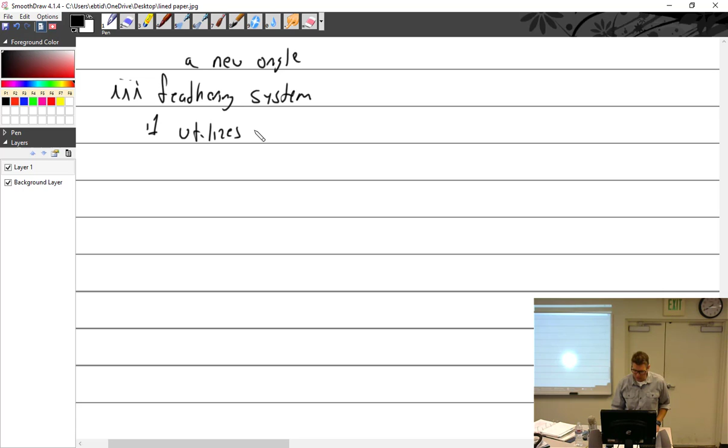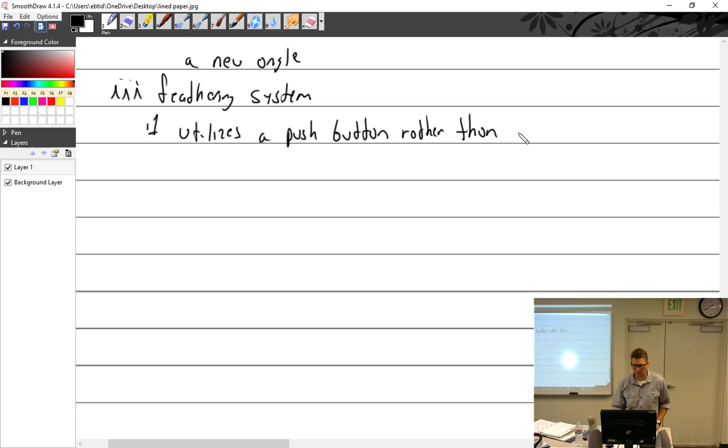remember. Not wrong. All right, we were talking about the feathering system, and I was writing notes for you because we already went over how it works. So this is what you wanted, so this is what you're going to get. Hand already hurts. Utilizes a push button rather than a lever to feather and unfeather a prop.

If you remember, on most planes, you just take the handle that says prop and just keep pulling it all the way back. There's usually a detent or something that keeps you from inadvertently going into feather while you're flying it, because that's not good. Oops, that was way up there. Okay, I didn't want to put that.

So, is there like a critical zone for feathering? Like if you go into feather while you're flying, there's a certain time that you can be in there, and then you have to service it? Or it's critical engine out. You want to talk about critical engine out? A one minute thing. So in an engine that has two right rotating, if you have a right and a left, you don't have critical engine out, do you?

Correct. Okay, so they're both normally turned to the right. Most twins turn to the right. I only know of a few that one goes right and one goes left. What is the one you fly? No, they both go to the right. It's just the Seminole, I think. Yeah, that's the only one I could think of. The Seneca. Piper Seneca is the only one I could think of.

So below a certain speed, you have critical engine out, which is which one? The left. Most critical. See, that's why I needed you to tell the story. So when the left one dies below a certain speed, and that's the blue line, right? No, the blue line is your single engine climb speed. Ah, okay. The VMC is your minimum controllable airspeed, below which you don't have enough rudder authority to counteract that yaw tendency. So that's not the blue line.

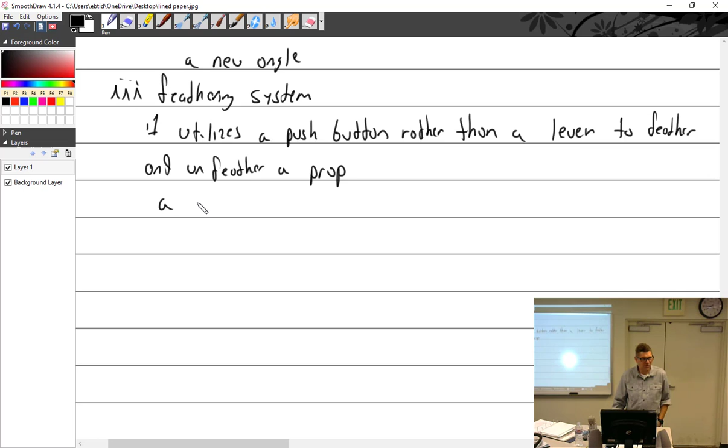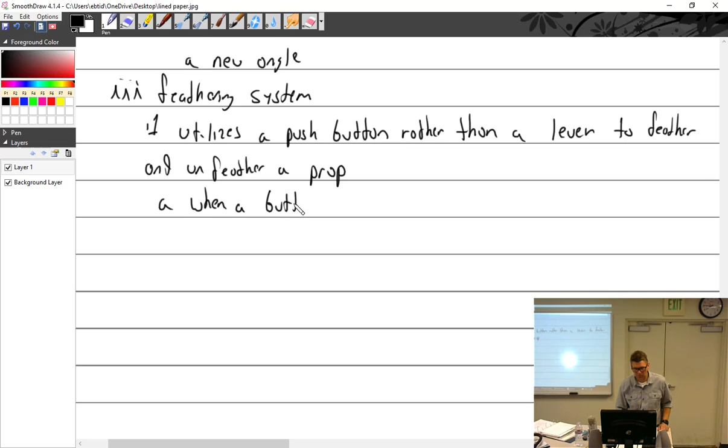Let's see. When a button is pressed, a holding coil holds the button in until the feathering operation is complete. Well, how does it know when it's complete? Pressure.

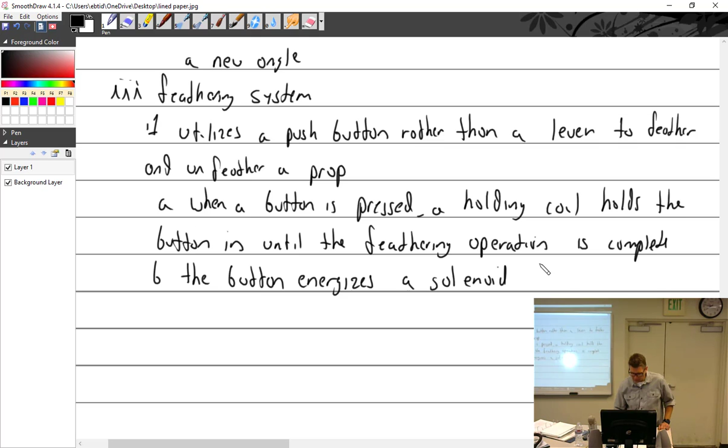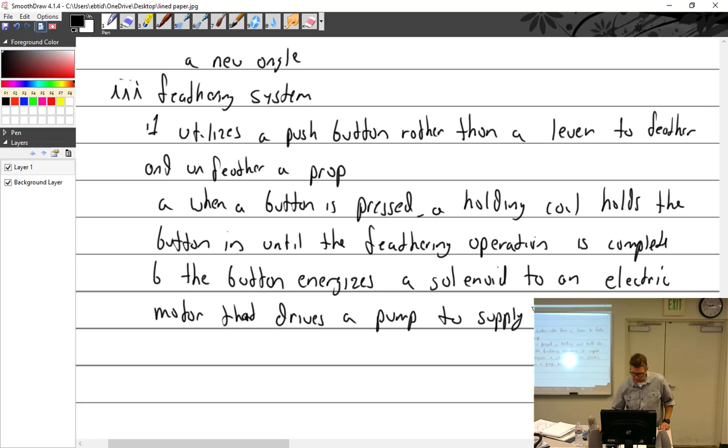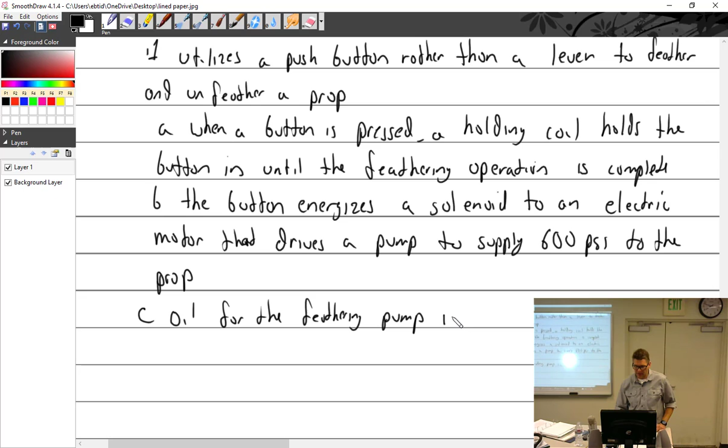The button energizes a solenoid to an electric motor that drives a pump to supply 600 psi to the prop. Oil for the feathering pump: feathering pump is supplied from the engine tank. And remember, we're talking radials most of the time, so the tank is not in the bottom of the engine, it's somewhere else remotely. Supplied from engine supply.

And as I was writing, I'm thinking, does it have to be the engine supply? Couldn't you just mount a tank right there next to the feathering pump? That's what you do for turbines. Well, there you go. I didn't know that. They have their own feathering pump, and then it's hydraulic fluid, not oil. The C-130 is like that. I don't know what these C-130s are like.

Or no, the prop control is all off engine oil, actually. Is that the C-27? The C-27, yeah, that's off engine oil. Which makes sense because you have a governor running off the engine oil and the drain and all that stuff. But talking about this old-timey stuff, couldn't you just mount a tank somewhere back in the tail with a feathering pump? Extra weight. It would be, but how much extra weight than running line all the way up?

I thought of another problem. You'd have cold oil back there. Yeah, you want your oil warm. So that was the problem I saw. You'd have to heat the oil up somehow. It's not to say they don't do it.

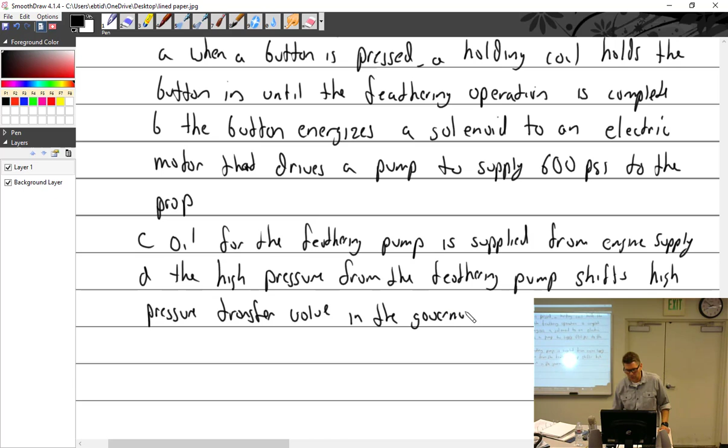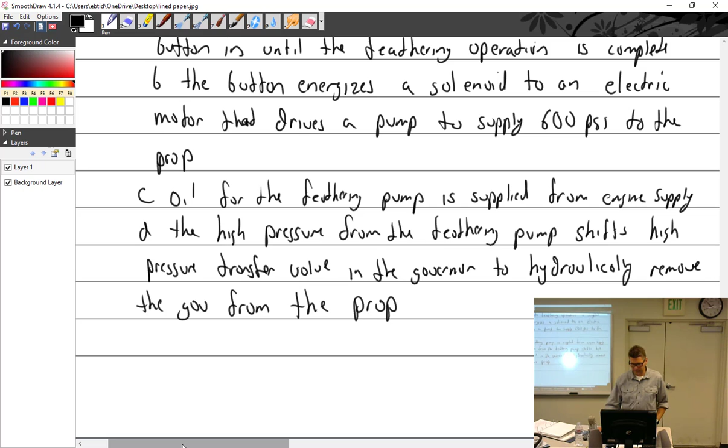Let's see, the high pressure from the feathering pump shifts the high pressure transfer valve in the governor, not the one in the engine, to hydraulically remove the governor from the prop.

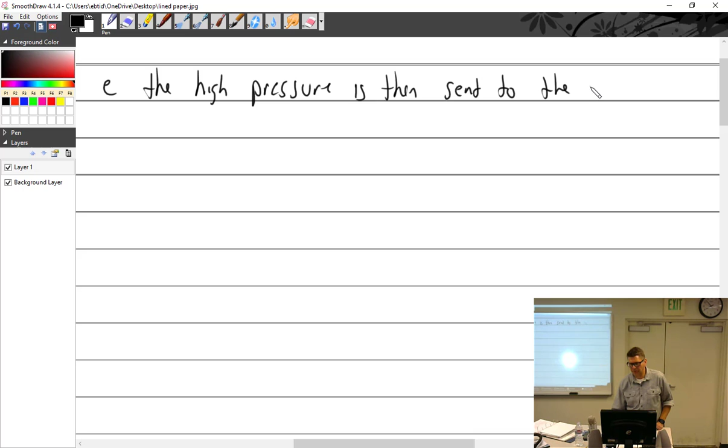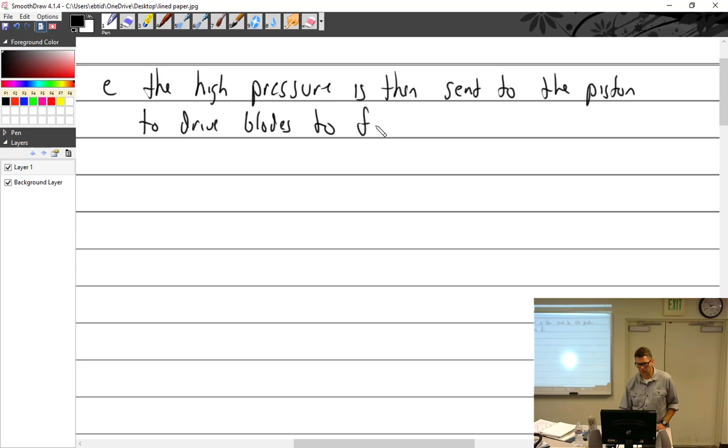Got it? So I got to move. Yes. Yes.

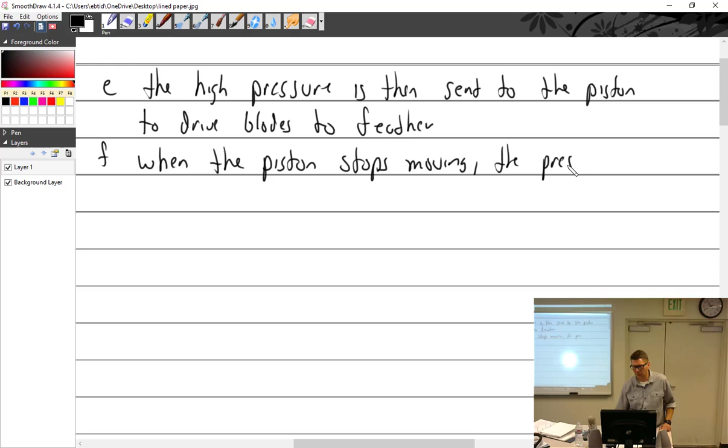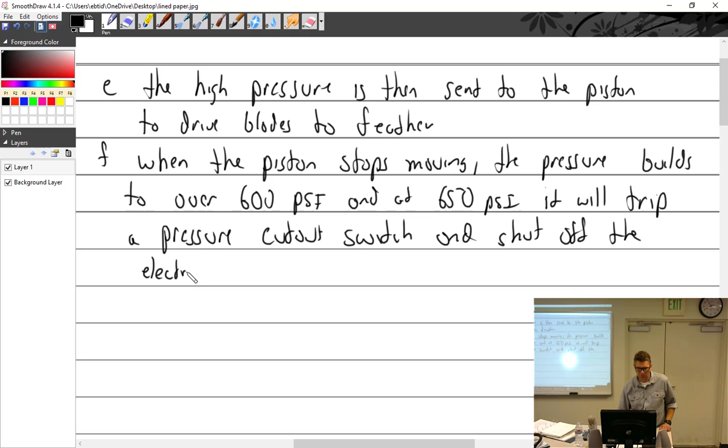The high pressure is then diverted. Is then diverted, I'll put sent. Sent to the piston to drive blades to feather. When the piston stops moving, the pressure builds.

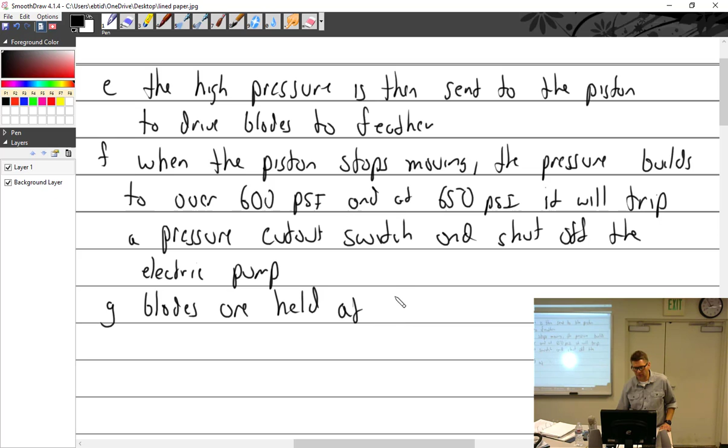To over 600 psi, and at 650 psi it will trip a pressure cutout switch and shut off the motor. I want to say the motor, electric pump. So I'm very specific.

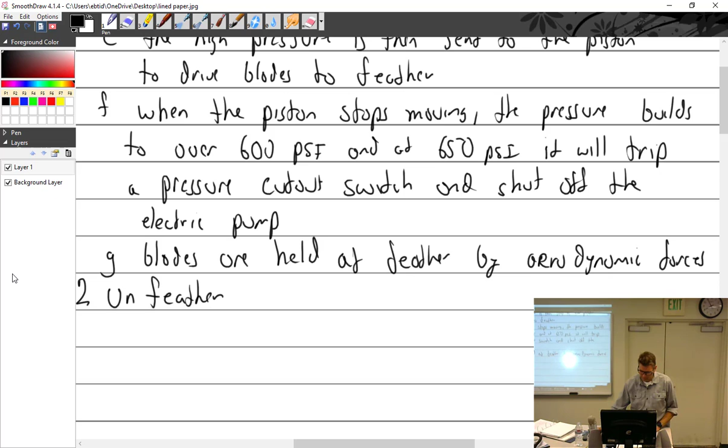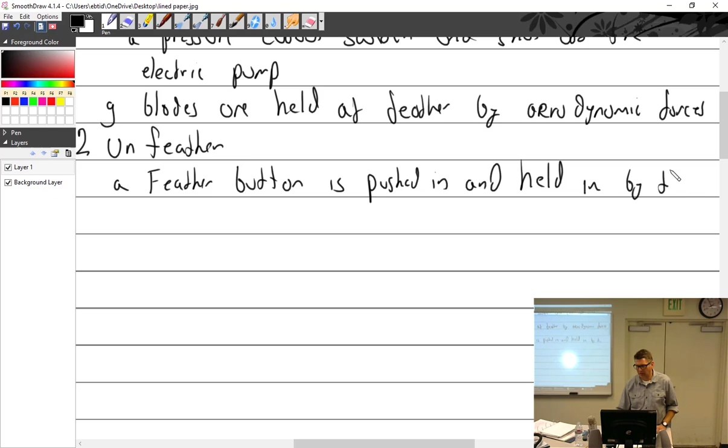And the blades are held at feather by aerodynamic forces. Got it? Kevin? Yeah, so from the way the Propeller and Controls book made it sound, all the pressure bled off from the propeller. Like there was no pressure in the propeller whatsoever, and it's solely held in feathering by aerodynamic forces. That's why I wrote that. Okay. Blades are held in feather by aerodynamic forces. Okay, so there's no pressure inside the... Yeah, it kind of bleeds off.

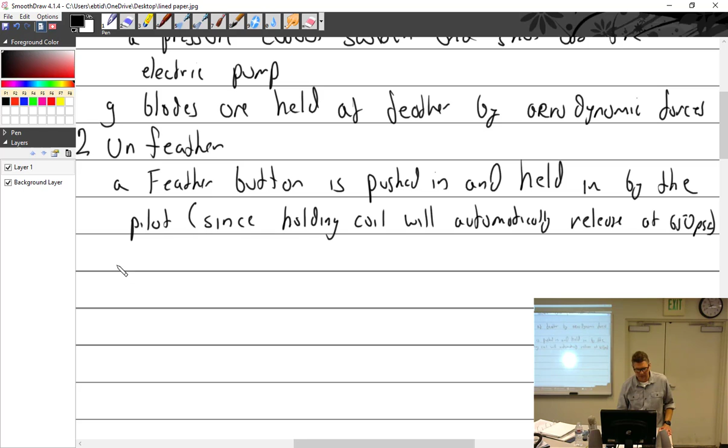Okay, unfeather. All right, how do we unfeather? Which button is it? The feather button, same button. Okay, feather button is pushed in and held in by the pilot. Why? Holding coil won't work it, since holding coil will release at 650 psi. There you go.

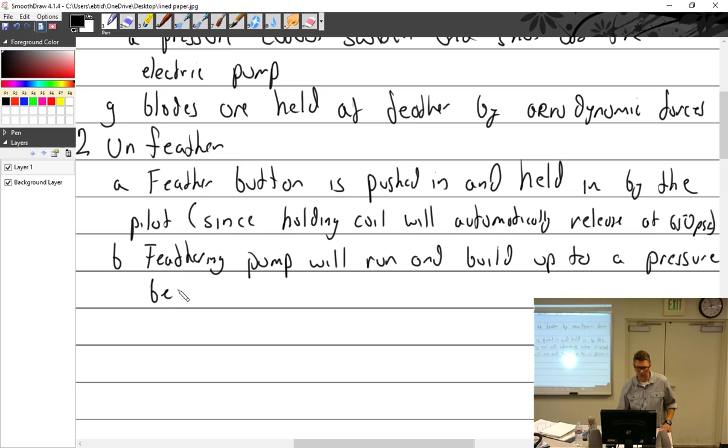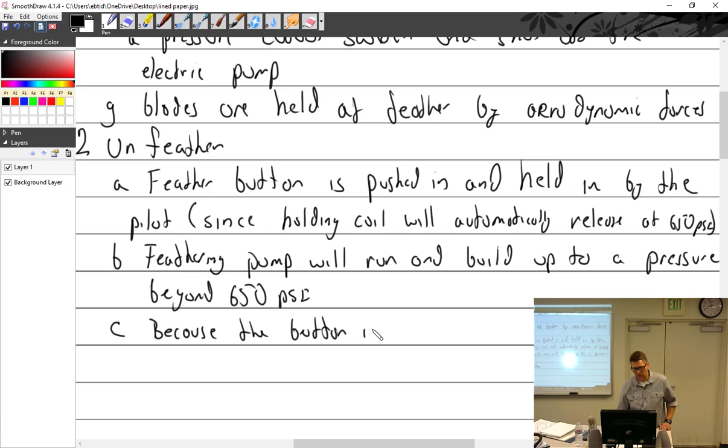So yeah, you push it in, and what it'll do? Start the pump. Pump will start working. Prop is in feather, it'll make it stay in feather. Build up to 650 and pop the button out. So you push it back in. Does the same thing over and over. Hold it. So feathering button, or the FB. Oops, I didn't want to write feathering button, I want to write feathering pump.

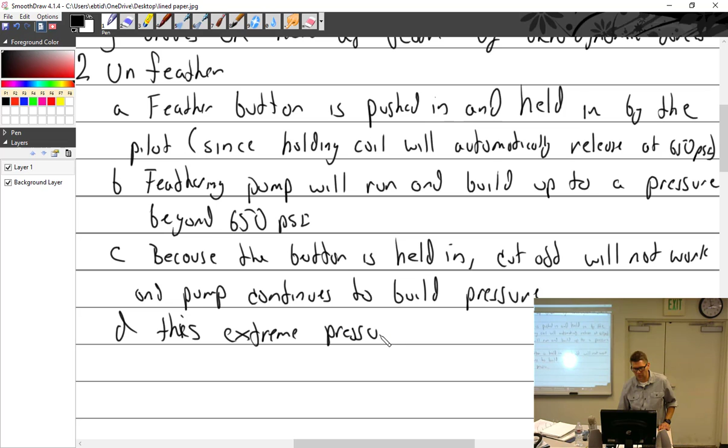Feathering pump will run and build up to a pressure beyond 650. And then because the button is held in, cutoff will not work, and pump continues to build pressure.

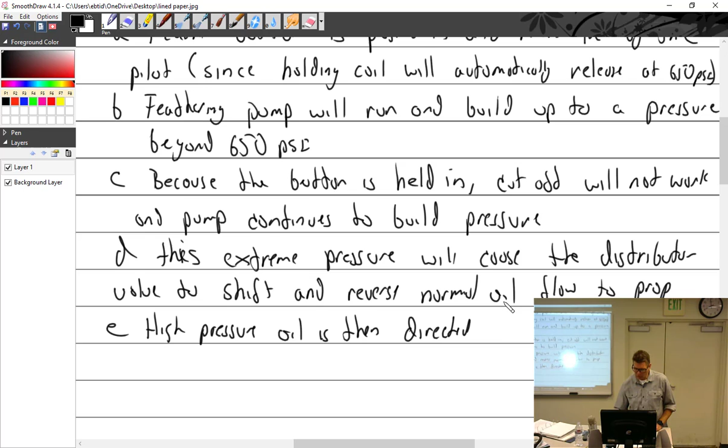This extreme pressure will cause the distributor valve to shift and reverse normal oil flow to prop. Okay, now it's backwards. The oil that used to go to the front of the dome goes to the back. The one that used to go to the back goes to the front.

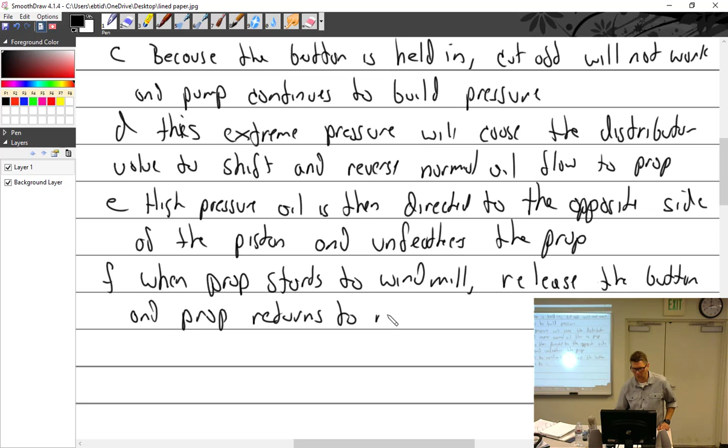High pressure oil is then directed to the opposite side of the piston and unfeathers the prop.

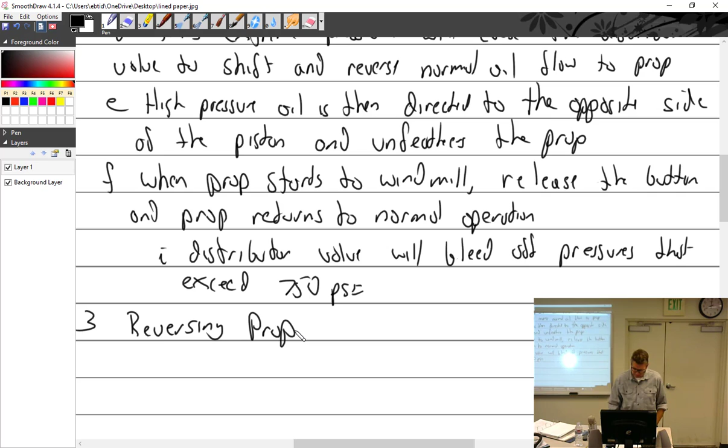When prop starts to windmill, release the feather button and prop returns to normal operation. And the distributor valve will bleed off pressures that exceed 750 psi.

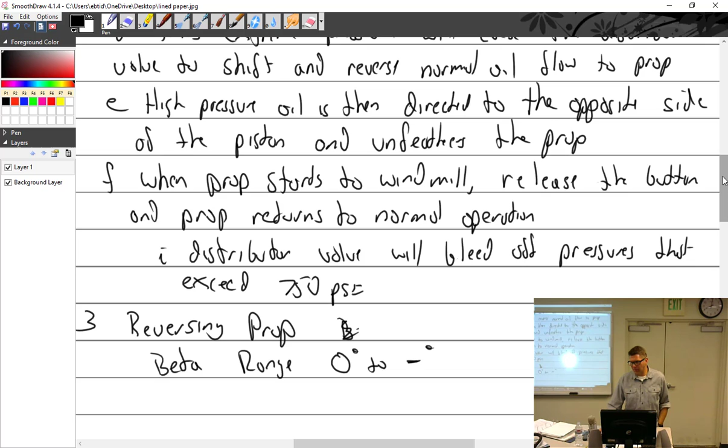Let's see here. I crossed this out, but I'm going to combine some stuff. So some props, like I said, have beta range. I thought I actually wrote it in here somewhere. So we'll just call it that. Reversing prop, beta range: 0 degrees to negative degrees.

And the way you put a prop into beta is kind of cool. When you feather a prop, you grab the blue knobs and pull them back past the detent, and it goes into feather. It's just a single position. But when you're working with the beta range, you're actually going to use the throttle side. So imagine you're coming into land.

When you come into land, you always make sure your props are full forward, high RPM, low pitch, because if you do a go around, that's where you want to start your climb. You don't want to give it full throttle and find out you're all the way back on high pitch with really high manifold pressure, low RPM. That's not good. But instead of doing a go around, you land with your throttles near idle, touch down, and then pull the throttles beyond a detent.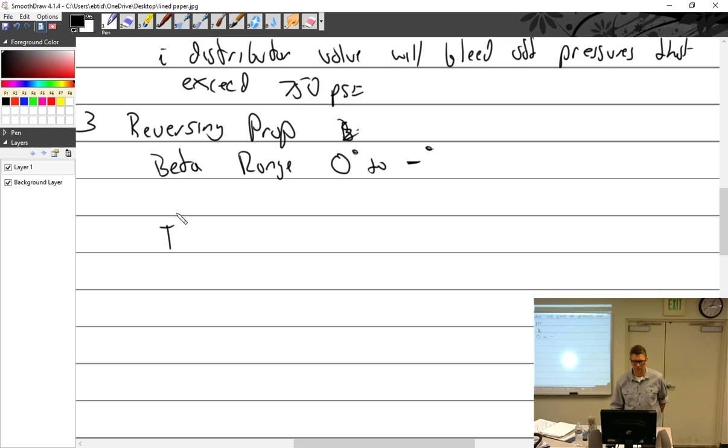The levers that you have. You have three, basically, per engine: condition, prop, throttle. No? Is this a different type of aircraft? Yes. So you had throttles and you had condition levers. Okay. So the condition levers were basically just feather and air start. Oh man. Okay, this is totally different then, isn't it?

Like from a King Air? Yeah, I mean it was different than the King Air, but everything else was automatic. Okay. So that range in between was always at 100%, right? So it was constant speed, but that speed was 100% all the time. Okay. So let's go back to this.

So you had which levers? Throttles and condition levers, and that's it. Oh wow. Okay. So your condition lever, you had two positions, which were air start and feather. I got it right. Correct. Pull it back to feather. Yeah. So that piece was no different.

So, going feather. So under normal conditions, you'd have it in the air start position? Well, no, I guess there is a run position in between the two. Okay, thank you. That makes a little more sense. What's air start? In the air, starting it? Correct. Okay. Oh, it would bring the props out of feather.

Correct. Okay. Whereas, and again, I always want to tell you guys when I'm the expert and when I'm not. This is not my field of expertise, but a King Air, not just a King Air, has a condition lever, which is high and low idle. And I'm not even sure if they all have it that way, but condition levers can be high and low, right? High idle, low idle. So you're running your air packs, a lot of bleed air is coming off, generators, and you can put it in high idle. So we already had that too, but it was a separate button. But you had it, like high idle.

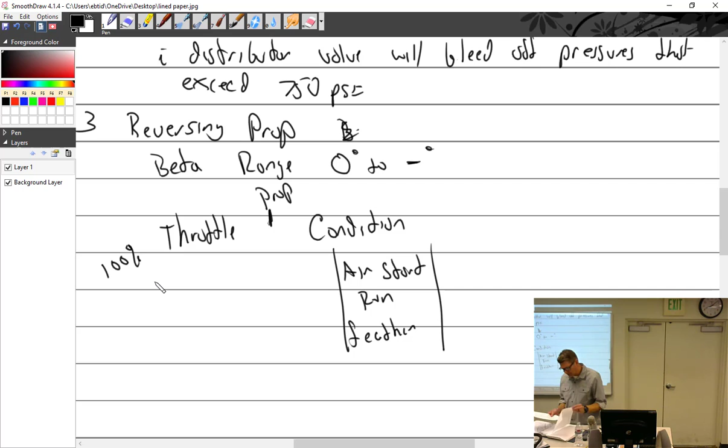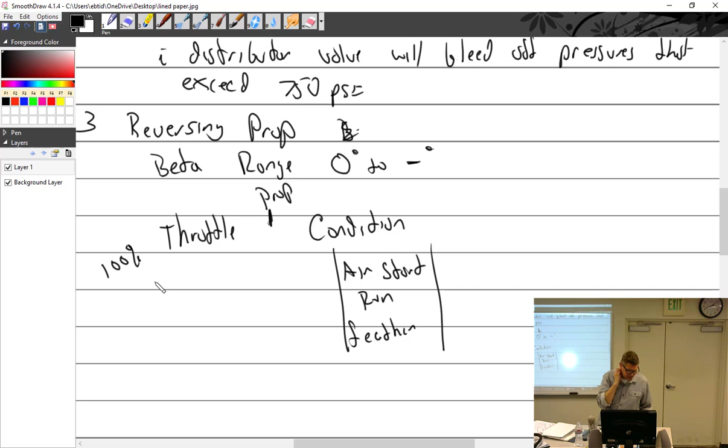So there's no spool-up time. I mean, that's normally the problem with a turbine engine, right? You get spool-up time. But because the engines were always at 100% and your throttle is actually moving the prop, there is no spool-up time, and yeah, it would make sense. So you're bringing your throttle up. The RPM is the same, but you really are adding power, as we know, because the pitch is changing, which does take more power to keep it at 100%. So I can see why you would call it the throttle. So there you go. But you read torque? Yes, of course.

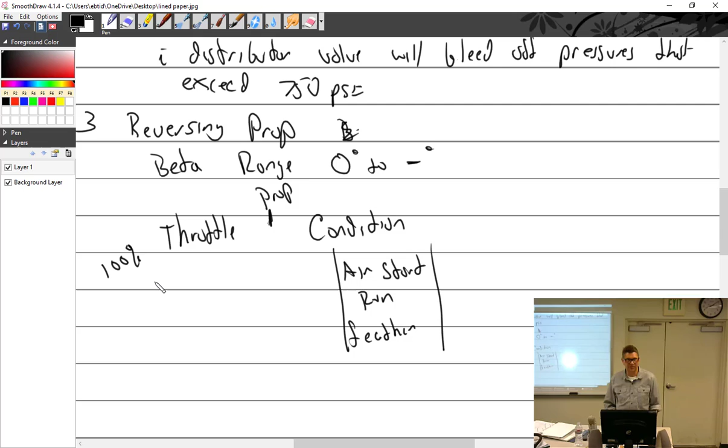What I wanted to do here. Okay, so when I talked about beta, like I said, there it is. So I kind of pulled most of that out. So you guys are clear on beta, how to do that. So beta is controlled by which lever? Throttle, okay. All right, 14, 15. And I don't want to do too much on this. I talked about how the Hartzell is used on the PT6, which is really belaboring a point; we've already covered a lot of stuff.

But the first thing I go into is how turboprops use different levers than what we're used to. And thank you, Tony. That was kind of cool. The notes I had written, like the King Air, had a throttle / power lever, the condition lever, and also the prop control lever, which had min, max, and feather positions. So it's so close to what you're talking about. The condition lever on this particular plane had fuel shutoff, then low idle, then high idle. So low idle is like 51 to 65%, and high idle is 65% and higher.

And then kind of where I go from that, like I said, I don't want to spend a lot of time on this because everything I tell you at this point, you'll forget it because it's not something you want to memorize and you're not going to use it, so you're going to lose it. But I thought it was interesting.

So the propeller control lever, the prop RPM lever has, I told you that, max position used when high RPM is desired and governs the speed at 2,000 RPM. What do I want to do? I think there's one test question on here, and the answer is there are 3 governors on the engine. Yeah, but I don't want to write all this. Operating principle remains the same as all. So operating principle of the prop, you already know it. It's the same as everything else. On speed, underspeed, overspeed. Spring loaded and counterweighted to which position? High pitch.

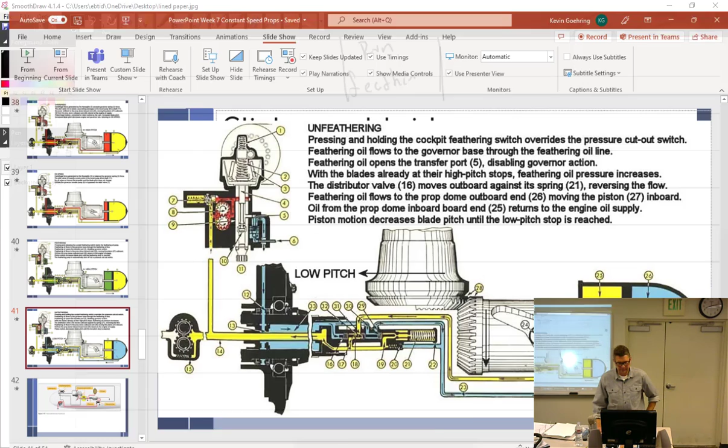So they had one governor that limited to 2,000 RPM. Uses a second overspeed governor parallel to take over if the primary governor fails to keep it at 2,000 RPM, right? And then an overspeed governor, which is preset slightly over. My notes said 2,120. Very specific. I had 106% here, but then for some reason I crossed it out, wrote 100. I don't know. And the third governor controls the fuel flow in the event both the prop governors fail. Set to 105 to 106. This governor is also used during beta operation.

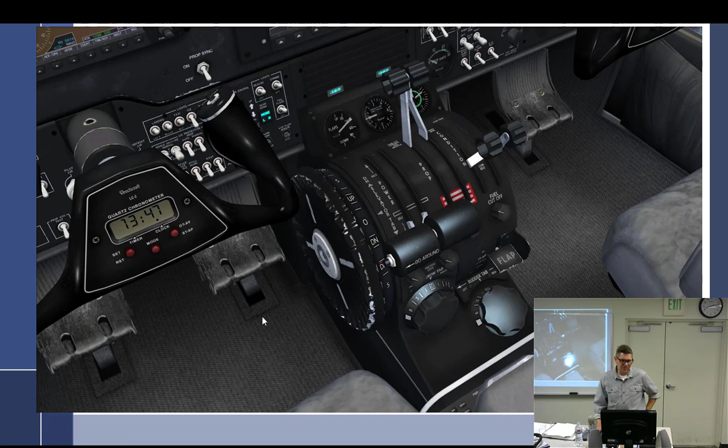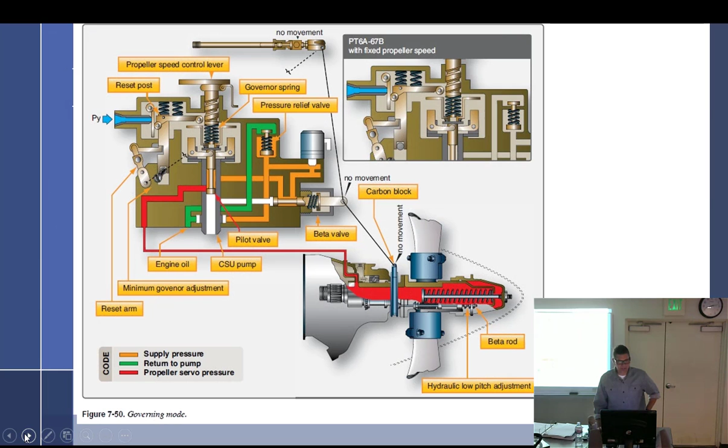Fuel flow to what? Engine. Okay. Why? So it's gonna cut fuel to the engine? Yeah. Okay. Good. Tony's nodding. I feel more comfortable now. Yeah, and it seems like that was 106. Okay. Let me see. 106%. Engine power. So I got 3 governors.

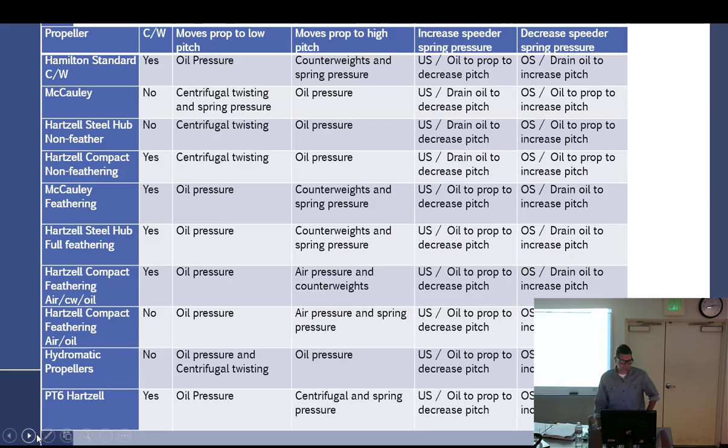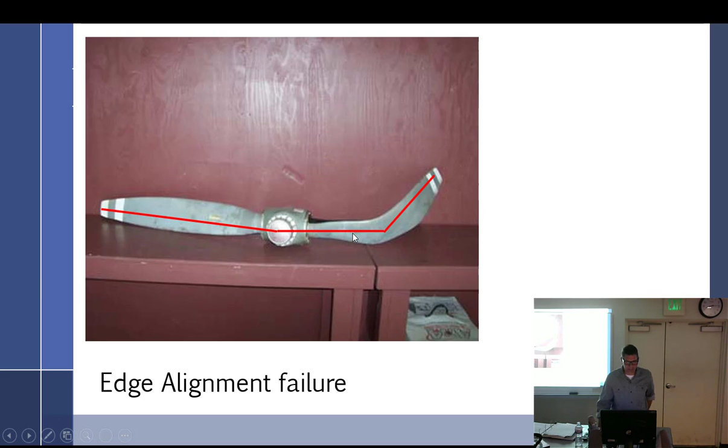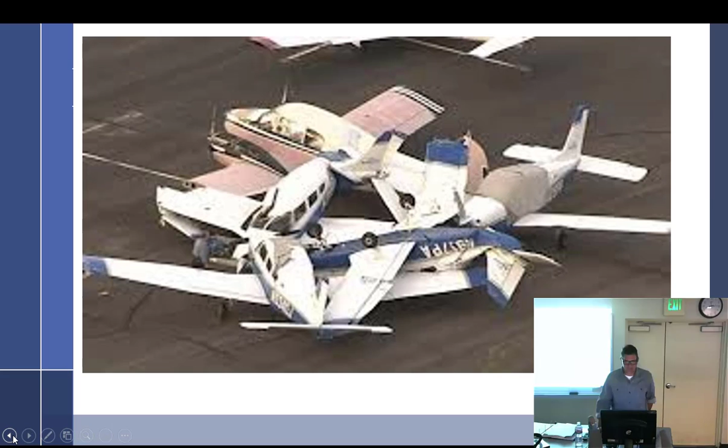There was a project when you guys were doing the fixed pitch prop, and there was a point in there where you're supposed to do edge alignment and face alignment, and I pulled it out because there's absolutely no decent data that I can get my hands on that says this is how you check edge alignment, this is how you check face alignment, and since these are things done by prop shops, I have never done it, so I have trouble saying do it this way, right? I don't want to teach you the wrong way, so I'd rather not teach you at all if I don't know. And so anyway, I came up with this as all of my research. Okay, what is edge alignment? And that was edge alignment.